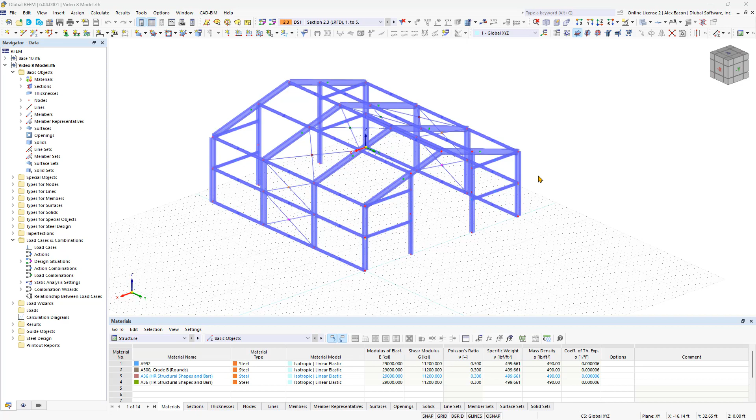To find a list of all available node types, double-click on a node in the Categories area. You can then change the respective node type. In addition to the standard node on a member, there is an option to set nodes between 2 points or between 2 nodes. These functions are useful when you need to quickly insert a node at a specific location between 2 known points.

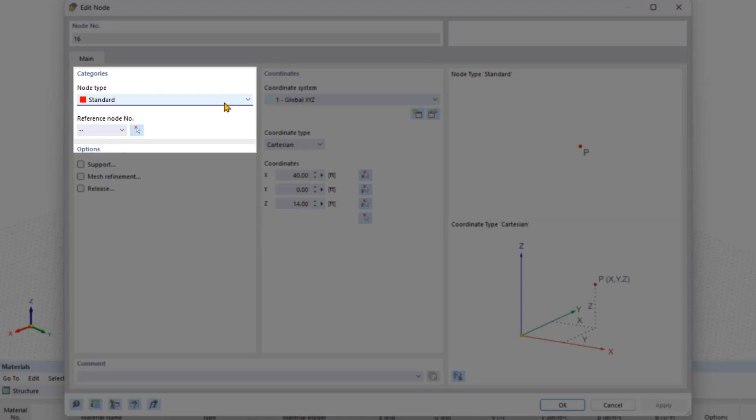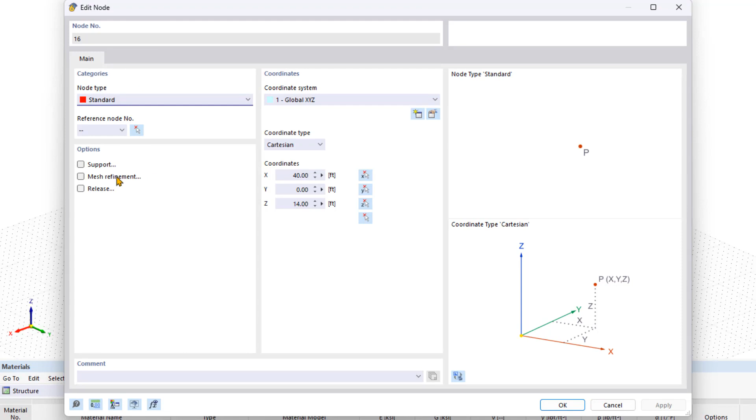Now we are going to close the Edit Node dialog box and add supports to our steel hull. To do this, we're going to click on Assign Nodal Support. In the new dialog box, you can enter the nodes manually in the node number area, or click the symbol on the right to select in the structural model.

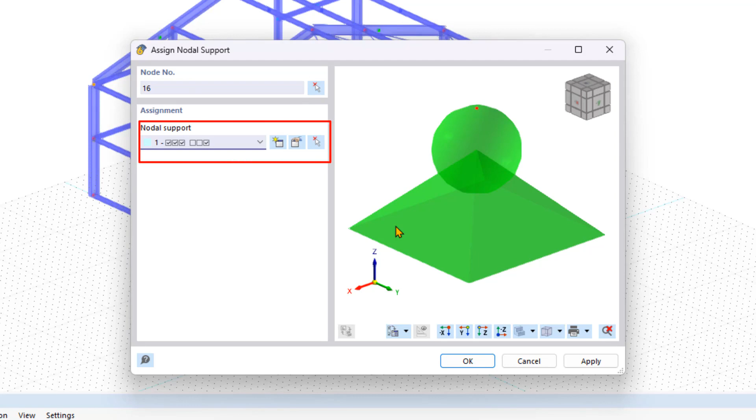Below you'll find a list of the most common nodal supports and the bitmap of the currently selected nodal support type. This is on the window to the right. You can use the symbol with the yellow star to create a new nodal support.

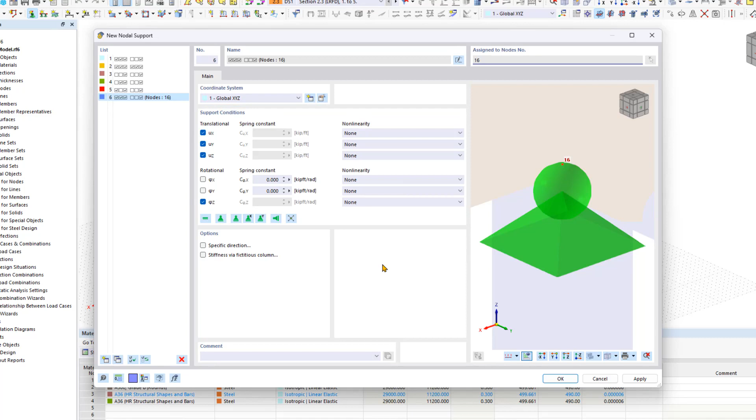The new nodal support dialog box is structured similarly to all dialog boxes for creating new elements. The list of available nodal supports is on the left, properties and additional options in the middle, and the help display or bitmap is on the right. In the support conditions, you can find quick access to various support types, as well as lists with nonlinearities. Note that nonlinear supports differ in color from linear supports.

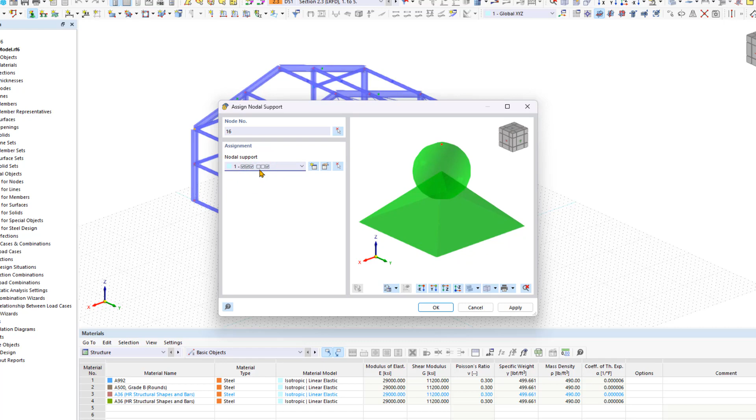For our steel hull, we want to use hinge supports, which are already included in the list on the left, so we don't need to define any new nodal supports. So now we're going to select the hinge support. Now we want to close the dialog box by clicking OK. Now let's rotate the hull so that we can easily drag a selection window over all the column bases at the same time.

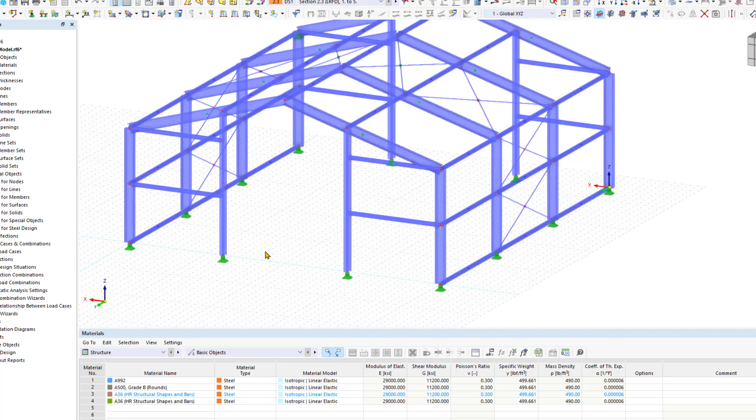You can adjust the display size of all nodal supports by right-clicking on any nodal support and using the slider in the shortcut menu. Our 3D hull is now completely modeled. Next, I'll show you how to use visibilities to work more efficiently in RFEM.

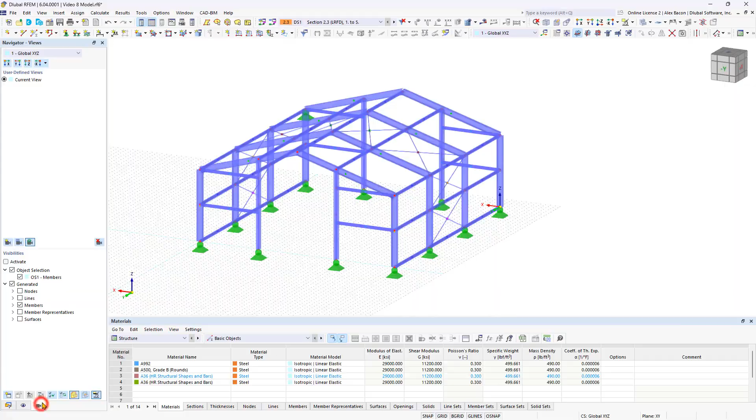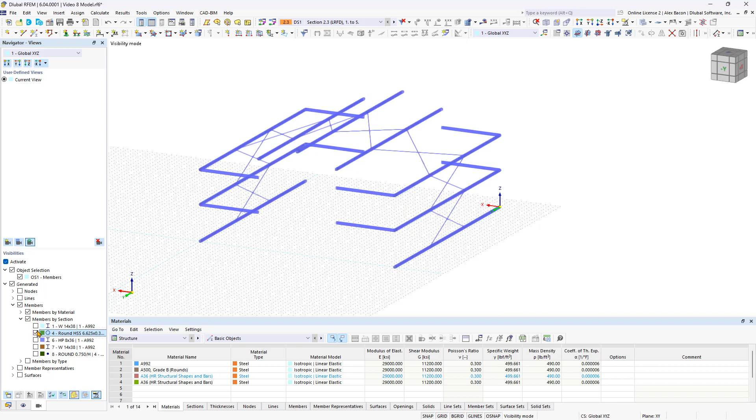In the Views Navigator, you can display and hide the desired elements in the structural analysis model. This makes it easier to work with large structural models. Expand Members by section in the Visibilities area, and then you can display the desired sections while hiding all others. In the Work window, you can right-click to completely hide elements in the background.

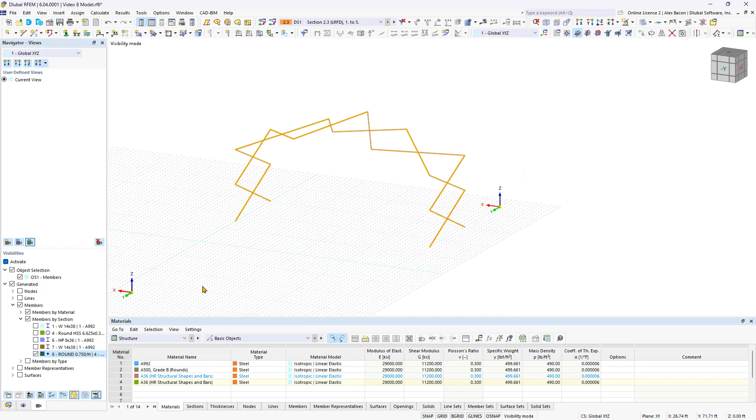Visibilities allow you to select, edit, or delete the desired elements efficiently. You can display the entire model again by deactivating visibilities. Now you know how to model an entire beam structure in RFEM 6. Try going through the individual steps again for the best learning experience. In the next video, we will continue with load cases and design situations.